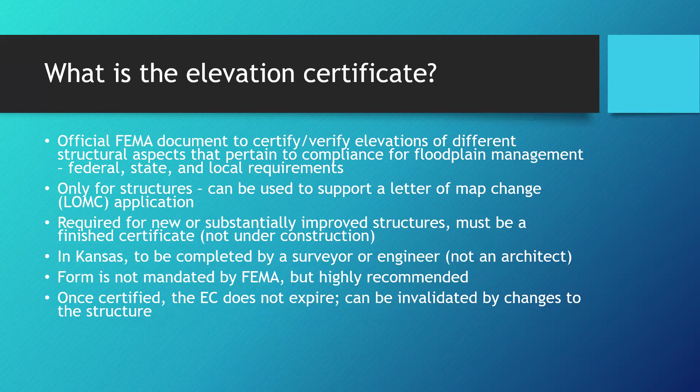This was released in 2022, but there were some formatting issues with it that were causing problems. So on November 6th, they re-released it with some of those corrections.

They allow now alphanumeric entries. There's no automatic rounding - that was an issue. Surveyors adding their digital signatures would lock the document, and it still kind of does that, but there's workarounds for that. The instruction button lets you toggle back and forth between the instructions and the form.

Line A6 specifies that photos must be in color. H1A removed the word subgrade, and there's updates also to the current floodproofing certificate. So basically, if you have a copy from when it was first released, you might want to go back and download it again if your copy is from before November 6th of 2023.

So who can complete which section? I have crossed out the sections that we've already covered this week. We are focusing on section C for the most part, and this is the section for the licensed surveyor or engineer to put their certified elevations in, and then that gets certified in the comments section in part D. So you do have to be licensed to fill those parts out. Sections H and I are only for insurance, and anyone can fill those out.

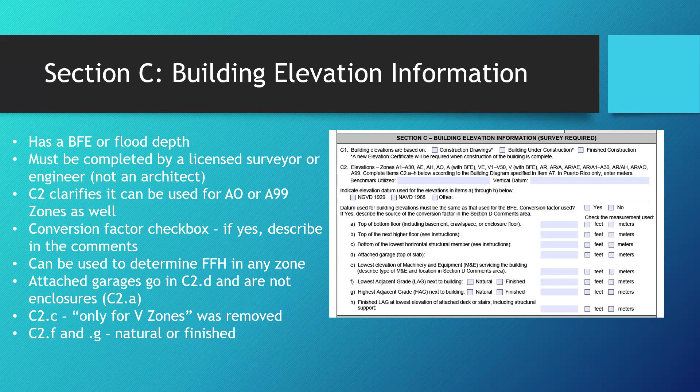And then C2F, G, and H, the lowest and highest adjacent grade, they've now distinguished between those being natural or finished, meaning fill. So that's a change from the previous form, and also helpful information for insurance and the floodplain administrator.

As we work with applicants or developers, it's really important to distinguish what these different terms mean, because they don't mean the same thing, even though sometimes they can coincide. The bottom floor is the lowest enclosed space, such as a basement, which is always the lowest floor, but it's also the bottom floor, or a crawl space, which is always the bottom floor, but not necessarily the lowest floor. So whatever the lowest floor of the structure is, that's the bottom floor. Whether it's finished or unfinished doesn't really matter. That is determined by the structure's features itself, and the surveyor documents that.

So whatever that is goes into C2A, which is the top of the bottom floor. Versus the lowest floor, that is a floodplain management term. It's not determined by the surveyor. It's the lowest enclosed area, including a basement, but does not include other types of compliant enclosures that are not part of the living space. They are elevating that living space, and allowing floodwaters to move freely in and out, and it's only used for parking, storage, or building access. That is a compliant enclosure and is not considered the lowest floor. This is determined by the community official using the elevation certificate and other documentation.

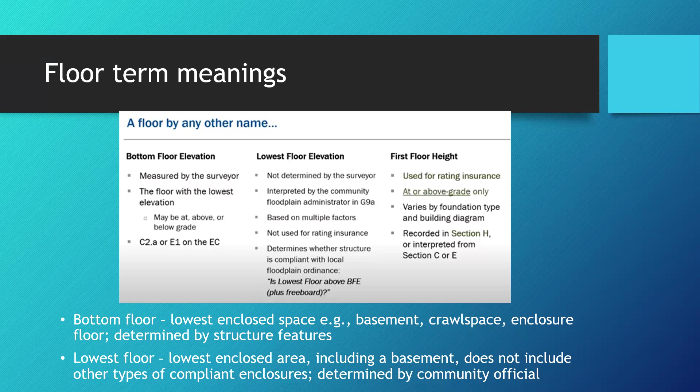That's what sections H and I are for. Those are the new sections to this version of the form, and that section is only used for insurance, or it could be interpreted from section C if they've had a survey done, or section E, which is only for AO zones. Either the property owner or the community official can fill that section out, and that's for that shallow flooding zone. So understanding the difference between what these three terms mean and what they refer to is important.

So as I mentioned, garage versus enclosure. Sometimes an enclosure is used as a garage, as you can see on the right side. That's the full story enclosure, diagram 7. You can use that enclosure for parking, storage, or building access, but it's elevating the living part of that structure, so the lowest floor is above that.

Again, that's the floodplain management term, whereas the bottom floor is the bottom of that enclosure. So that's considered an enclosure, whereas on the left, you have the attached garage, which is adjacent to the living area and structurally connected, but it's not elevating any part of the structure. That's the difference between an attached garage, and obviously the bottom and lowest floor for a slab on grade are the same floor, because there's nothing beneath it -- it's not being elevated by anything but a concrete slab, so there's no enclosure here. It's just important to understand the difference between the two, because of how that information is entered into section C.

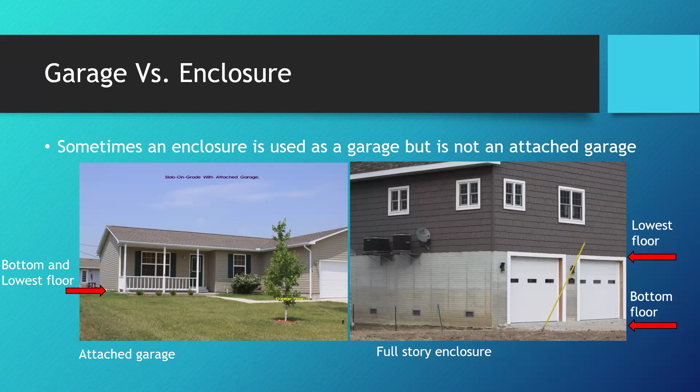The lowest floor of the lowest enclosed area, including a basement, in an unfinished or flood-resistant enclosure used only for parking, storage, or building access, in any area other than a basement, is not the lowest floor, provided it's not in violation of the regulations. If the lowest enclosed area is used for anything other than parking, building access, or storage, it's considered the lowest floor. That could happen if someone converts an enclosure to living space or blocks the flood vents, making it the lowest floor and usually in violation. The floor of the basement is always the lowest floor, regardless of how it's used, finished or unfinished.

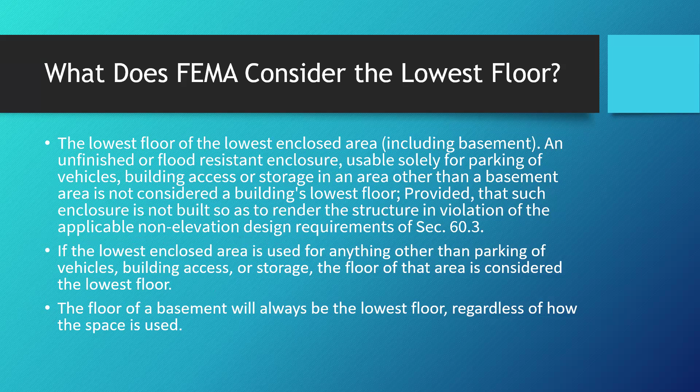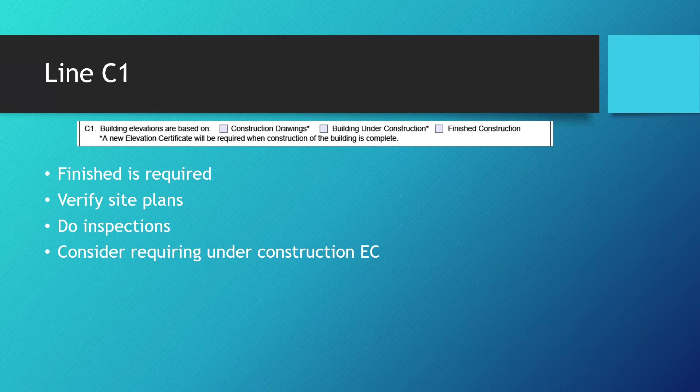So line C1 is building elevations based on drawings. Is it under construction or the finished construction? The finished construction is always required at the end, but requiring an under-construction certificate is also useful, because then you can verify these elevations before things are complete. You don't want to wait until finished construction to find a mistake has been made, because then it's very expensive to fix. So you might consider requiring that as part of the permitting process.

Then line C2, the elevations list the zones and the BFE, which goes back into section B that we talked about yesterday. At this point, you have the benchmark you're using as well as the vertical datum. The unique identifier for the benchmark is registered through the National Geodetic Survey, and it's the permanent ID.

You can check with the maintainer—they have a website where all of this is mapped out, and you can find where the different benchmarks are located and maintained. This is a big improvement since the 90s, when the FIRM would just list where the benchmark was supposed to be, like a nail in a tree or some marking on a bridge. Now they're digitally maintained so you can locate them and know they're reliable.

The vertical datum for the benchmark elevation for the elevations in section C must be in the same datum as the base flood elevation. If you have to do a conversion because it's an older map, you'd need to indicate what software was used and some additional information in the comments section—you can read through the instructions, which are very thorough on what should go there. They put this in as a checklist mechanism so it doesn't get missed, because mismatched datums would not be good.

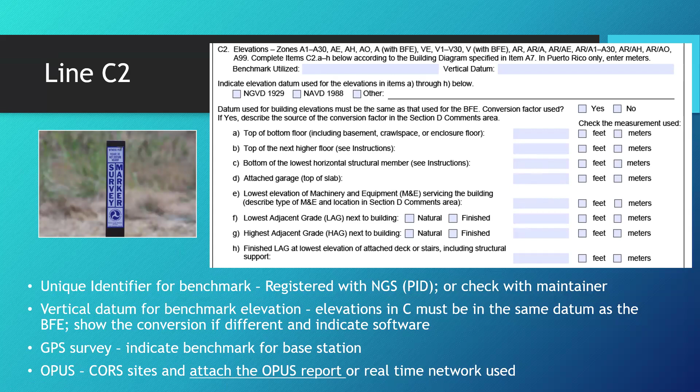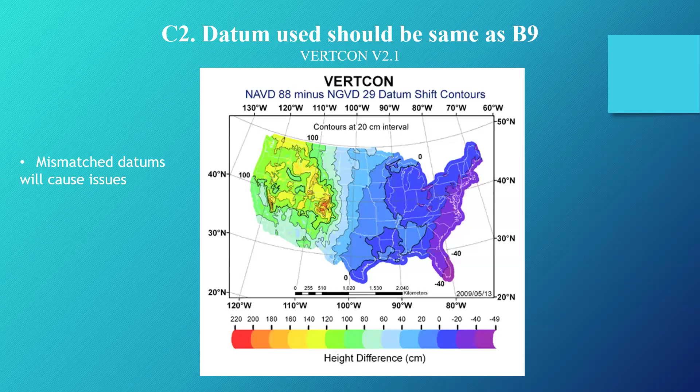So I went over an example like this yesterday, but if they are different, then they have to be converted, and we want to make sure that that is correct. So it's definitely worth taking a second look at.

So this is what they are using now. Through the NGS, you have the coordinate conversion and transformation tool. This is called NCAT, so it's easily available, and you can do your conversions here and then include that information

So this is OPUS that I had mentioned, the online positioning user service. This is commonly used by surveyors. So these are more technological advances that are good for surveying.

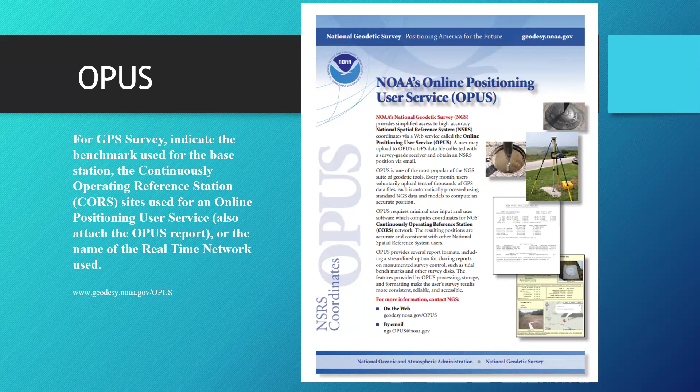So you have the base station signal that's captured by the surveyor. Again, if you use this, put that information in the elevation certificate, what station was used, attach the report. And if you're reviewing a certificate and you see a note about this, make sure you get that report with it. And the website for using this has a lot of information and advice on clear weather, waiting a day to submit things, how to calibrate the antenna, how to avoid mistakes, etc.

Survey stakes are commonly used when they are staking out the site, making sure that it's within the confines of the building plan. And they set out the survey stakes to know what the elevation is and for the developers to build to that elevation.

There have been a few instances of them being misread, but more what we see is property owners tampering with them, so that's something to be aware of. People have pushed them further down into the ground for whatever reason, and then the floor was built too low, and that is a costly mistake to do. I don't know why you would do that to yourself, but it has happened, so that's something for surveyors to be aware of, as well as developers when they're

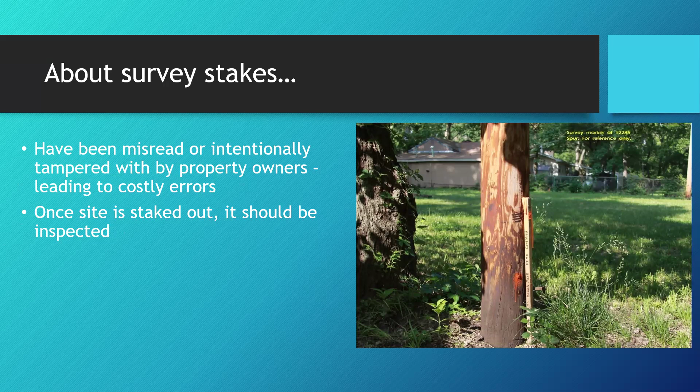starting to build. So once it's staked out, it should be inspected. As a floodplain administrator, you might want to go out there with the developer and or surveyor or engineer to ensure that everything matches up with the plans. You want to check the setbacks and everything and make sure that it's where it's supposed to be.

So C2A through H, again, verifying that the datum is the same as the base flood elevation, check yes or no for that.

Again, where the terminology becomes important. So surveyors definitely know what the top of the bottom floor is. Applicants and property owners might not. So again, making sure that everybody's on the same page with what that means. And of course, the lowest floor is not a term that you'd find on here. That's the floodplain management term.

Nothing should be left blank in this section. So if it doesn't apply to the structure, NA should be entered. And again, they have fixed that so that you can add text to these boxes.

So the diagram is going to determine where the measurements are taken. So depending on what kind of foundation you have, that should match up with this information. So you should go look at the diagram and then compare it to section C and make sure that that makes sense. Like if it says there's no enclosure, but then they take measurements for an enclosure or something.

If they said it was a slab on grade, but then they add in something that doesn't make sense, that should be looked into. Or the comments should clarify any anomalies or unusual characteristics that might make it difficult to interpret what the information is conveying.

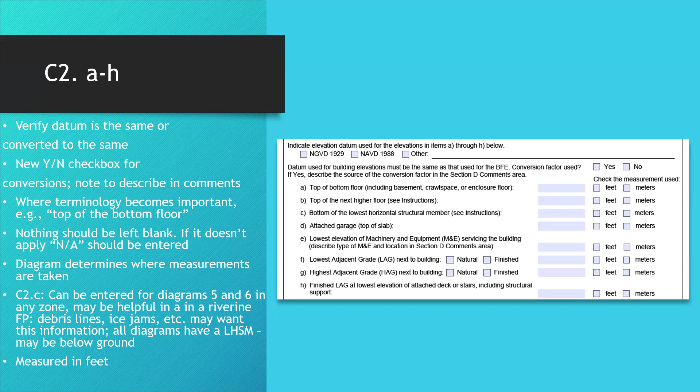So just looking through the diagram drawings, it should be maybe a little more clear now where these measurements are taken. So C2A is the bottom floor. Top of the bottom floor, that would be the top of the slab for a 1A or a 1B, which is just a raised slab. And then F through H are all always going to be site specific on what the grade is.

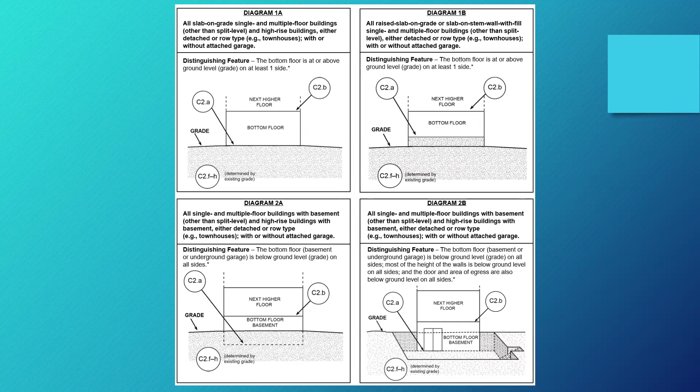Diagrams 2A and 2B, so the top of the bottom floor is always going to be the basement floor, and then C2B will be the next higher floor, which is usually what the living floor is, or they're both living floors either way.

Diagram 3, the bottom floor would be for that split level, whatever the bottom floor is, and that's usually an enclosure, and it's at grade at least on one side. And then diagram 4, of course, would be the basement floor, and then the next higher floor adjacent to that, because it's a split level.

Diagram 5, C2A is the elevated floor. There's no enclosure in this diagram. And then C2B, if there is a next higher floor.

And then for diagram 6, the partial enclosure, obviously it's going to be the enclosure floor. C2B is above that. And then since we're looking at enclosures, A8 comes into play. So A through C for flood openings goes into the enclosure.

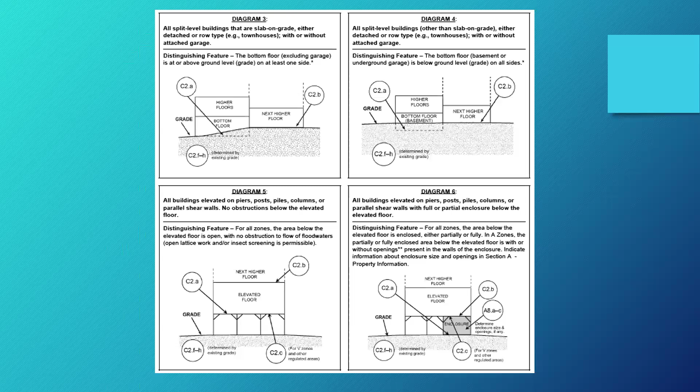Diagram 7 is the full story enclosure. So C2A is the enclosure floor. C2B would be the living space in most cases. And then you have A8 for the flood openings. And then this just kind of points out the different grades that would be listed in F, G, and H.

Diagram 8 is your regular crawl space. So you have the flood openings, the crawl space floor, C2A, and then the floor directly above that, C2B.

And then finally, you have the below grade crawl space, which is an unusual diagram, but C2A is the bottom of the subgrade crawl space. C2B is the next higher floor.

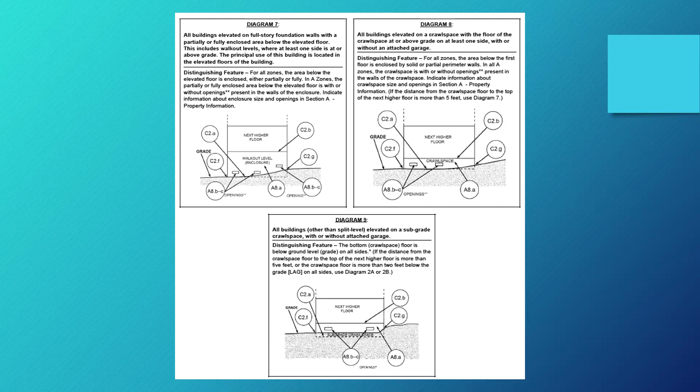And then there's these helpful drawings also in the certificate instructions that just kind of illustrate more where to take these measurements, just breaking it down a little bit more.

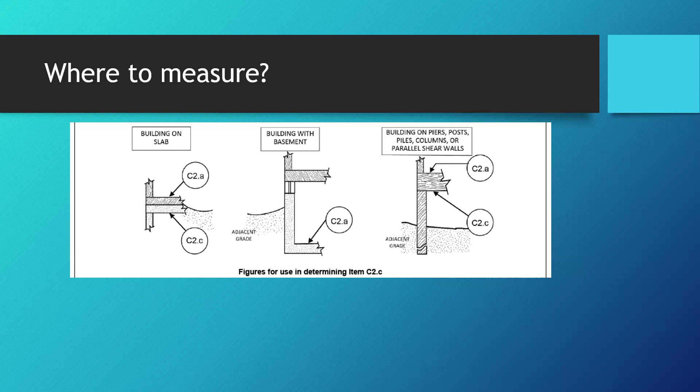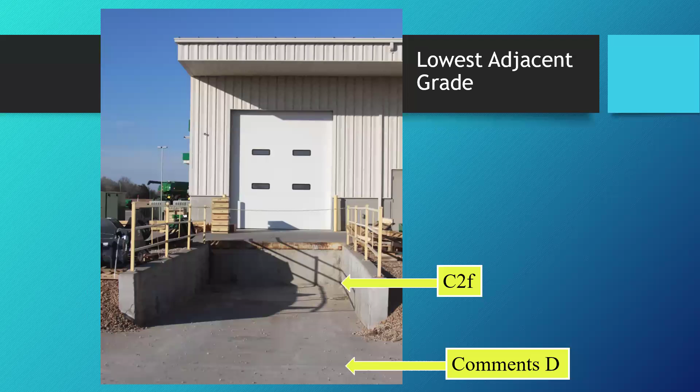And so that's another part of section C, is C2E is the lowest machinery or equipment that is servicing the building. That needs to be at or above the base flood elevation. It doesn't have to be 1 foot above, but it has to be at least at or above. And that's also part of compliance that gets documented there.

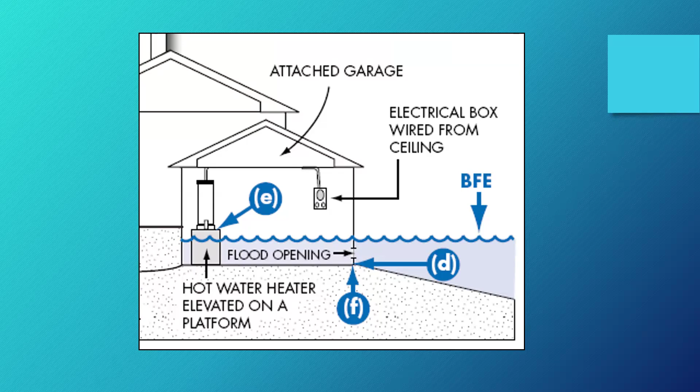So F, G, and H, that's the highest adjacent grade, lowest adjacent grade, and whatever the lowest adjacent grade is that's touching an attached deck or stairs. And as I mentioned, they now distinguish between finished and natural grade. So again, the lowest grade that is touching in direct contact with the foundation, that's the lowest grade. And then they define natural grade as undisturbed natural surface prior to any excavation or fill. So it hasn't been altered in any way. That's just the way the ground is naturally. And it may actually take a little bit of research to determine if it's considered natural grade or not.

Zone AO, they want you to use natural grade if possible. And so you might be able to determine what the natural grade was based on grading plans or something. But if possible, you would do that and then attach source information. And if that sounds a little bit weird, the instructions do explain all of that. So the highest adjacent grade, same, the highest grade that's in direct contact with the foundation, and the same for finding any supporting source information for the AO zone. Otherwise it's just natural or finished.

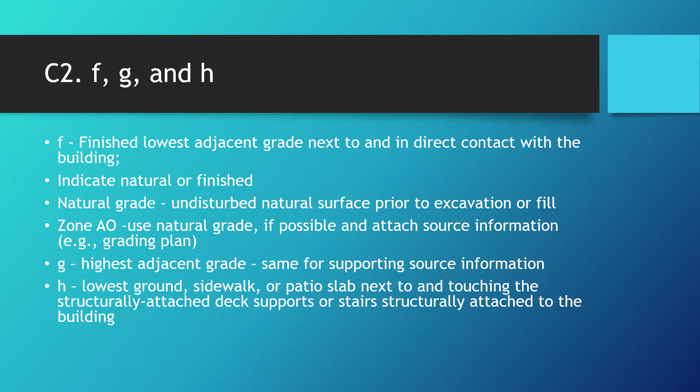There can be situations where something looks structurally connected, but it's not, even if it's very close to or touching the structure. Structurally connected means it's relying on the structural posts and house framing for support. So floating or freestanding structures aren't attached, and wouldn't have to be included in Part H, but you'd probably want to note that in the comments. Like if you received an elevation certificate and see a set of stairs, but there's nothing in C2H, that would be something to clarify.

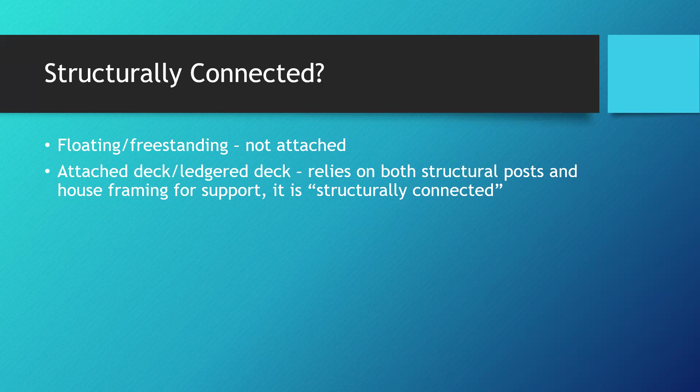An attached deck or a ledger deck would be structurally connected, or you can have a situation where they're adjacent to the building.

Sometimes there's issues accessing the crawl space floor, and the instructions give a couple of different options to acquire that elevation. You can measure the distance from the crawl space floor from the outside to the next higher floor and then subtract that distance, or you could go from the exterior grade and measure that to the next higher floor. If you look through the vents and confirm that the interior floor is at the same elevation as the exterior grade, the floodplain administrator might have information related to this based on the original construction and permitting for an existing structure. You won't have that for a new structure, so it shouldn't matter. This is for an existing structure trying to access that area. Or the property owner might have documentation like that. Again, look through the vents as much as possible, and of course there could always be interior access from the house. Then use section D to explain how that elevation was obtained.

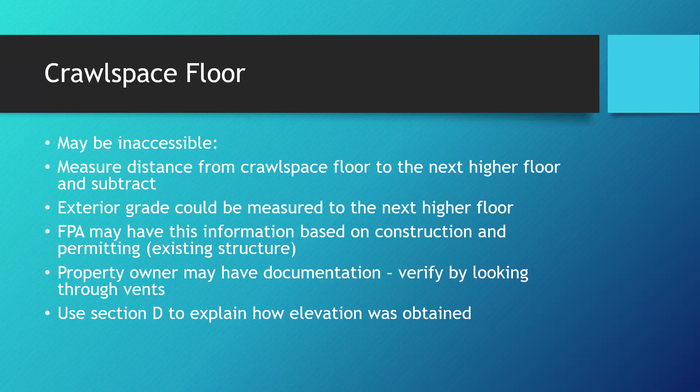C2E, as I mentioned, is also part of compliance, the lowest machinery or equipment that is servicing the building. Before FEMA included it as a rule, people would elevate their houses on whatever foundation, but then leave the utilities on the ground.

In this case, you can see the debris line on this HVAC system, and they were paying a lot of claims on HVAC units left outside on the ground like this. So they made that rule and made floodplain administrators responsible for enforcing that utilities anywhere are at least at or above the base flood elevation. We want to make sure that is the case, and that needs to be included on the elevation certificate no matter where it is, even if it's on the roof. Whatever that lowest equipment is goes in that section, and that would include underfloor ductwork.

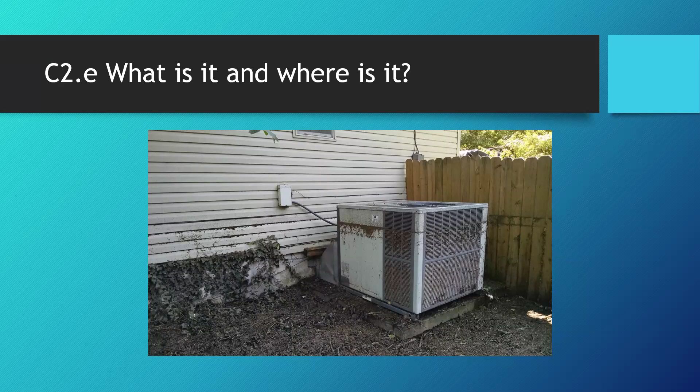So yes, it's still a compliance issue. It would still be a violation of the regulations to just leave it on the ground like that. It needs to be at or above the base flood elevation, and some communities require that equipment be elevated to the same elevation as the lowest floor.

If it's a utility that's owned by a company and not the property owner or the renter, then it doesn't count for C2E. That would be something separate that doesn't impact that person's flood insurance policy, and since it doesn't belong to them, it would not go on the elevation certificate.

This has gotten harder to enforce because under the legacy rating system, if you left your utilities on the floor, however low it was, that could change your rating floor, which could change your flood insurance premium by something like 50%. That's not the case anymore since we've had this separation between insurance and floodplain management with the new rating system. So it's harder to enforce a violation like this that doesn't have quite the same consequences, but there is also a little bit of incentive with the machinery and equipment elevation discount on insurance, which are called mitigation credits.

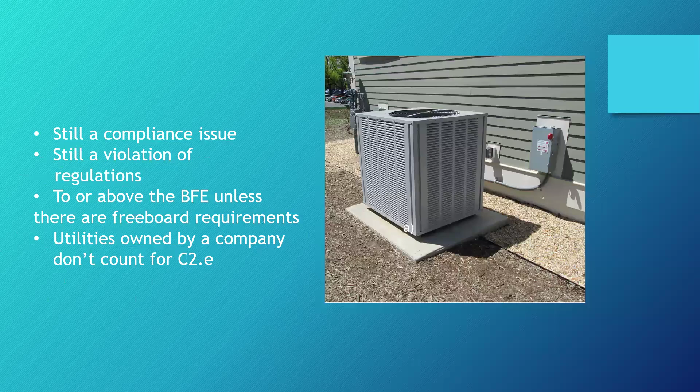There's a 5% discount for elevated machinery and equipment. There are also discounts for proper flood venting, which is based on other elevations, your lowest adjacent grade, first floor height, and foundation type. There are discounts for using certain building materials over others, like concrete rating higher than regular wood. You can check out the rating discount guide from FEMA if you're interested in that, or want to help people save money on their insurance policies.

And then there's also the technical bulletin on flood openings, which again is part of the mitigation discount. There's also statutory discounts on insurance, just a little insurance side part, but there's newly mapped procedures and glide paths and stuff.

So back to section C, there are common errors that we see, and some of these have been better handled after the new form came out and they were addressed by FEMA.

So C2A could be not measured from the basement or crawl space floor, so that mistake does happen. Again, understanding what the bottom floor means.

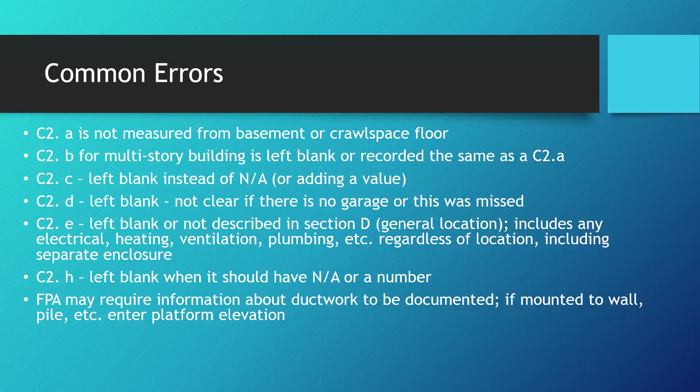And for CRS communities, there is a new CRS checklist for this version of the form, and there's also a new memo of correctness to correct an existing elevation certificate. There's instructions on the different methods that you can use depending on the issue that you're having.

No community, whether in CRS or not, should accept an incomplete certificate. The finished and correct elevation certificate should be a condition of issuing the certificate of occupancy. So that's often a good way of getting violations corrected, is to withhold that certificate of occupancy, and then they cannot legally live there or get utilities until that is fixed.

But this checklist and the memo of correctness, I think, is probably a best practice for communities, whether or not they're in the CRS program. So you can probably find those on crsresources.org, or I can send them to you.

And then I just wanted to go into a little bit of basic floodplain management for a few minutes, as it relates to elevation certificates, because that's not the only documentation that we need. Obviously, if we're building in the floodway, it also needs a no-rise certification, which is a study analysis from an engineer that proves it will not cause a rise in the base flood elevation, which is also signed, sealed, and dated by a registered professional engineer, so not a surveyor. An engineer has to evaluate that technical and scientific information.

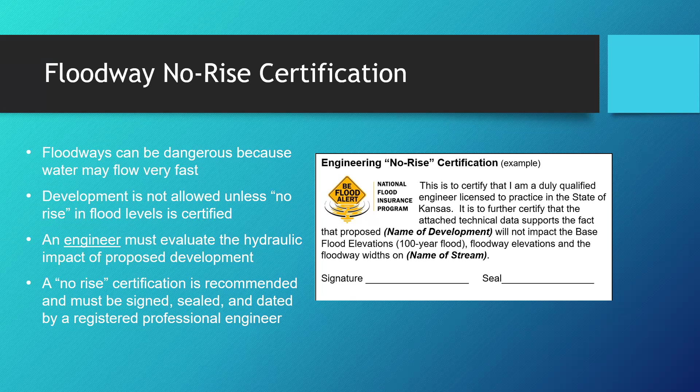Just a side note, if you're new to floodplain management: structures built on fill. Often if people are using fill, their goal is to get a LOMR-F and take it out of the floodplain. FEMA has written into the community acknowledgement form that whatever is built on top of that fill pad is still going to conform with the regulations.

So we need to look at that and make sure the utilities are still elevated above the base flood elevation, and that any enclosure still has flood openings, even if it's elevated above, because that's what's required. Fill is free of construction debris. It should be a homogeneous earthen consistency. The DWR fill permit is required if you're using an average of a foot or more on fill. And then there's always requirements for vegetation and sloping.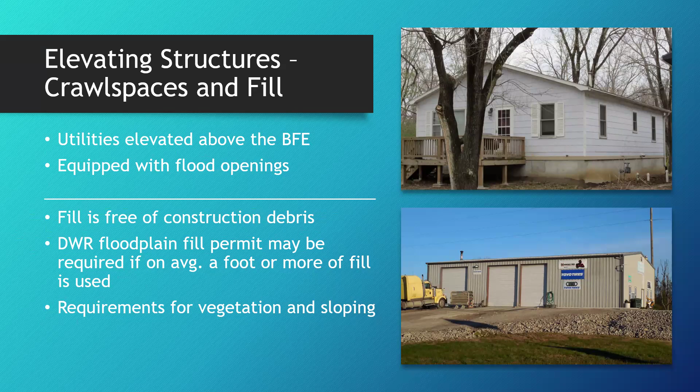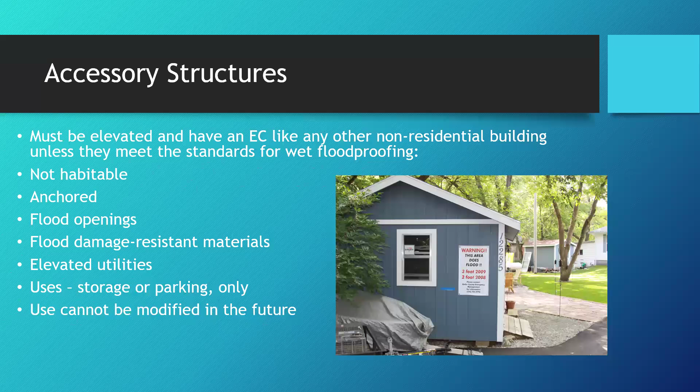And then all of these conditions can be documented on a permit. So flood openings, we see where they go on the elevation certificate. That information can also just be included on a permit without that, again, as long as it's eligible for that exemption.

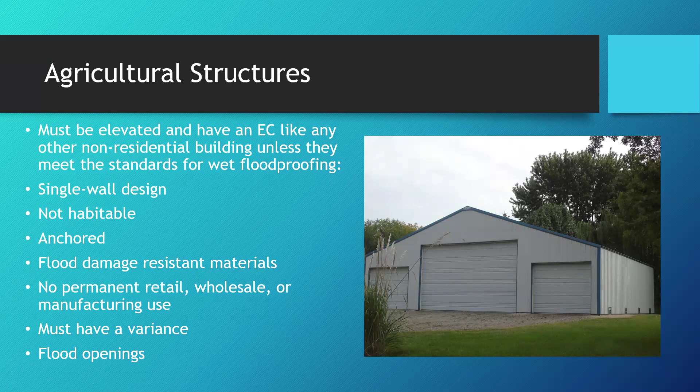It can be exempt, but again, it does need a permit and a variance. There's a lot of guidance out there. FEMA has a policy on this, and there's this full bulletin on ag and accessory structures that you can look at, which is very helpful. We've also started including agricultural structural language in our ordinances. This guidance document has examples, more model ordinance language, and information on how to do a community-wide exception for all agricultural structures.

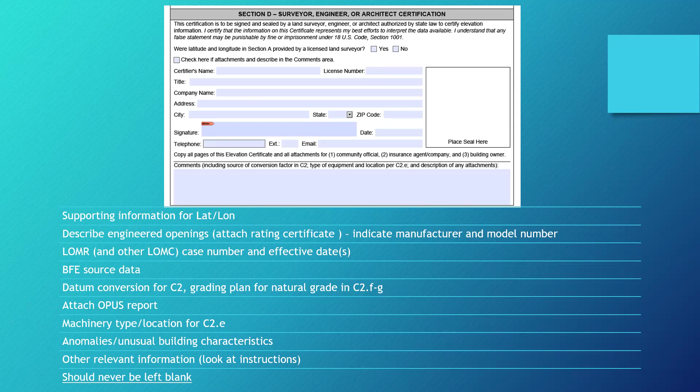If there's an effective LOMR or another letter of map change, put the case number and the effective date of that letter impacting the structure, where you got the base flood elevation, that data source, the datum conversion, what software you used, attach any grading plans for how you determine natural grade in an AO zone, attach the OPUS report. You should describe the location and type of lowest machinery equipment. Again, any anomalies or unusual building characteristics that could help clarify any confusing entries. Other relevant information - again, look at the instructions, and this should never be left blank. There should always be some kind of comments describing these different things.

So the signature basically puts that professional's license on the line. They could be held criminally responsible if they were to falsify any of that data, and it's punishable. We've never had issues like that. Again, it's usually been property owners that are trying to do things that are not quite legal, but yeah, the license is on the line, and it's a crime if they were to falsify information on purpose.

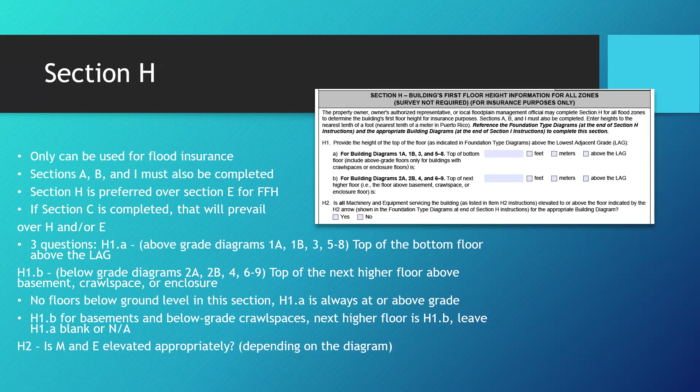And then lastly, H2 is whether the M&E is elevated appropriately - yes or no, pretty straightforward.

Again, we're not doing anything crazy. We just have regular measuring instruments that we're using for the relative distance from the top of the floor to the existing lowest adjacent grade, as built grade, not surveyed. Just using a yardstick, a tape measure, something like that.

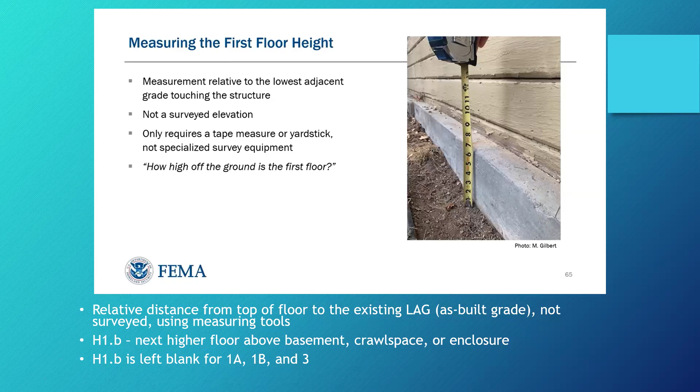And I think it's pretty straightforward - how high off the ground is the first floor? That's all we're looking at. And then, sorry, that's the next slide.

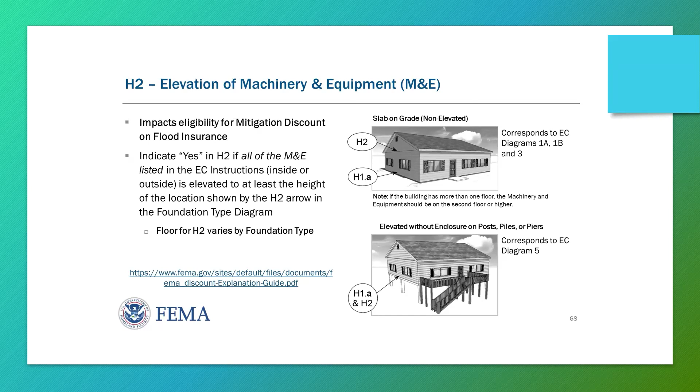So this is the elevation of machinery and equipment. They just kind of tell you where it has to be based on your diagram. So if it's a slab on grade, it would have to be like the next higher floor or the attic level or higher. For a basement, just the floor above the basement or the floor above the crawl space. As long as it's elevated in that way, there's a diagram of all of them here.

And this shows you just where to measure those things based on the diagram. So they really spell it out for you, make it pretty straightforward, as well as where your machinery and equipment have to be to get that discount.

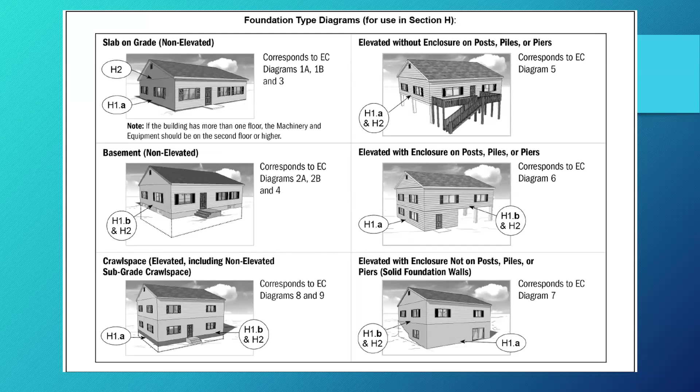And then I think this one's from the discount guide, just a little bit more about the discounts. I've already talked about this, but yeah.